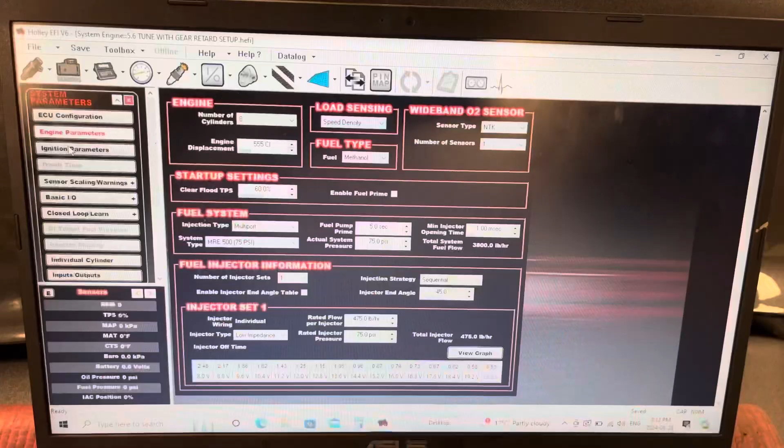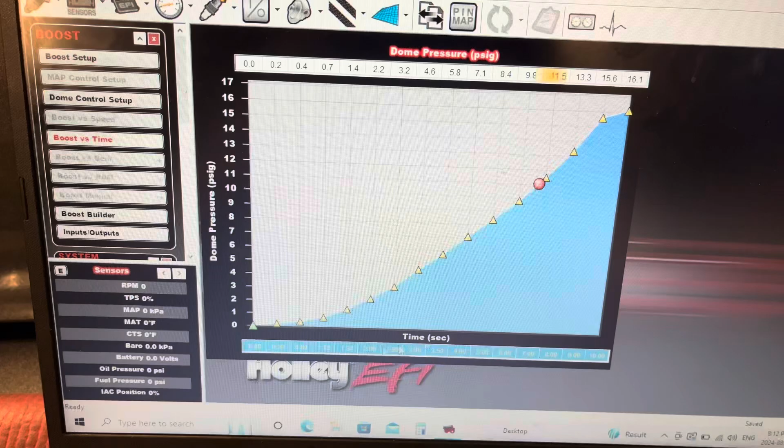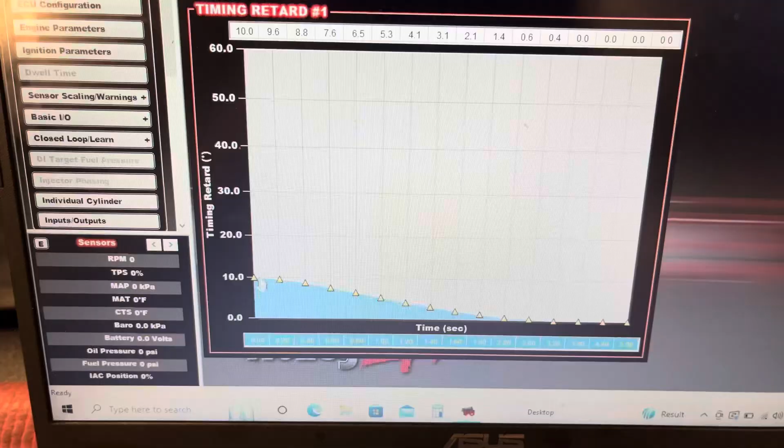So this was the tune, a 3,500 RPM leave. Nothing crazy on the boost ramp, basically not doing anything, on wastegates for the first little bit, and not really doing much till about 2 seconds. Timing-wise, I was pulling 10 degrees and putting it back in over 2 seconds.

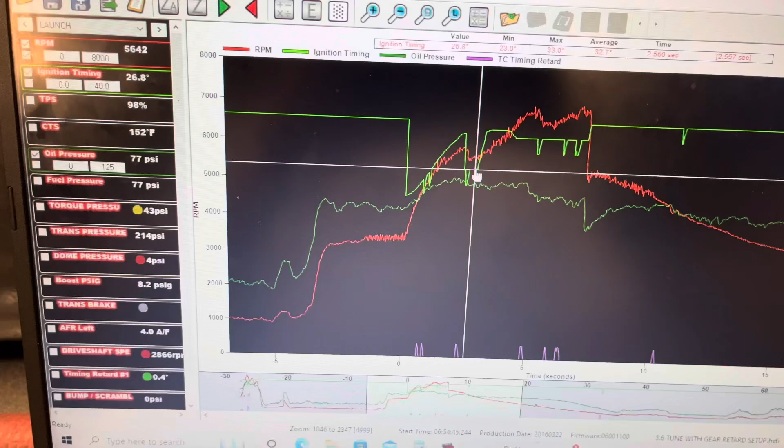And this is the data log. So it left at roughly 3.2 pounds of boost. I shifted first gear pretty low, 5,800, which I've been trying to shift a little bit lower. And if I look at the ignition timing here, this is the timing getting knocked off at the launch, this is it coming back in. Right at the shift you can see it drops off to, what was that, I think it was a 31. Yeah, 31, so it knocks it off to almost 27. So I had 5 degrees coming out for half a second.

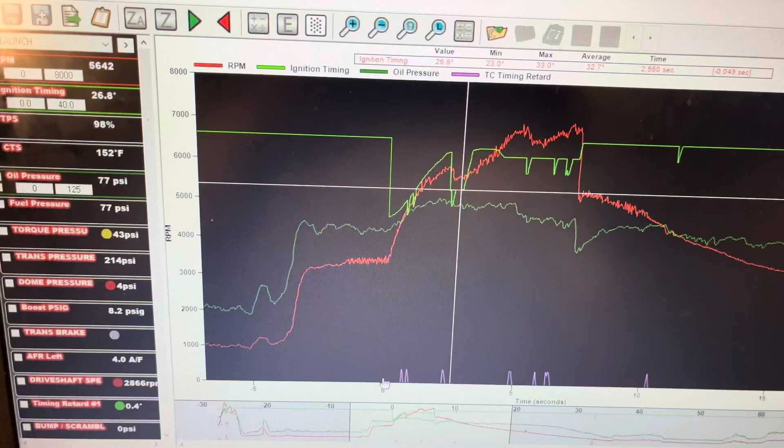So everything worked perfectly there. I do have a Davis-like traction control box in the car, and these are just little corrections it's making along the way, so it pulled a little bit there too. But basically the gear retard worked perfectly, made 15.4 up top. And the other thing I wanted to look at on my A to B pass was my oil pressure.

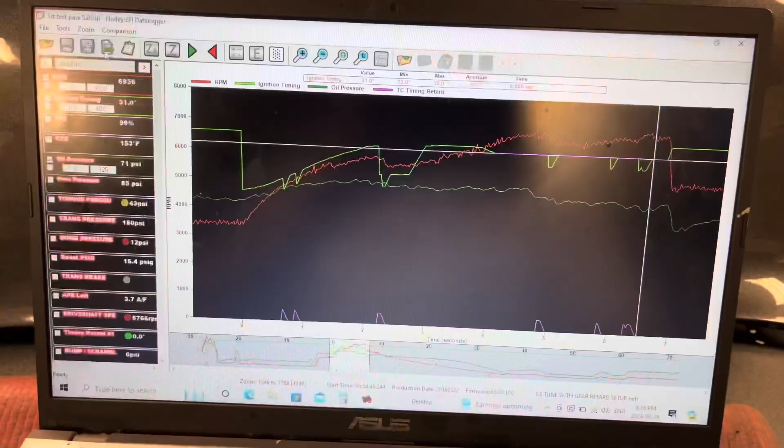I'm still a little on the fence about if there's something going on with the engine, so I really want to keep an eye on that. So if you look at the oil pressure on that run, which is now this green one, you can see that it made 66 right here on the trans brake.

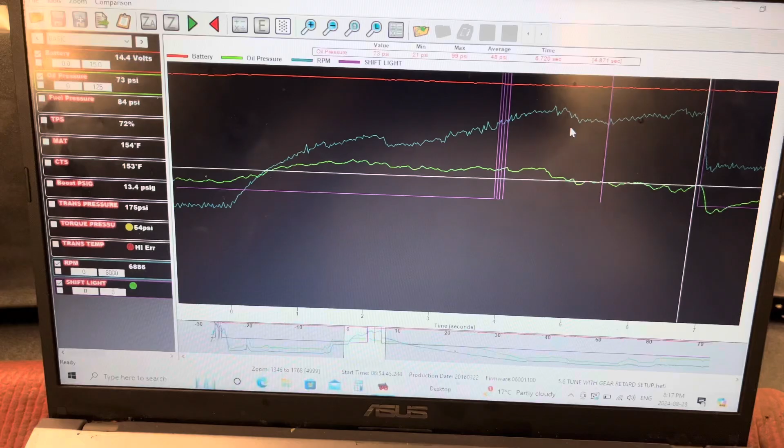Kind of dipped up to 79 through first gear, second gear 78. And at the end of the run it kind of dips down a little bit here, which, looking back at a lot of old data logs, is pretty normal for this thing. It does drop down to about 70, 73 there, so it loses a couple pounds, which looks to be pretty normal. Probably not 100% right, but I went back like 2 years looking at data logs and it gets to that one point and just dips down a little bit from there. So that one wasn't really concerning.

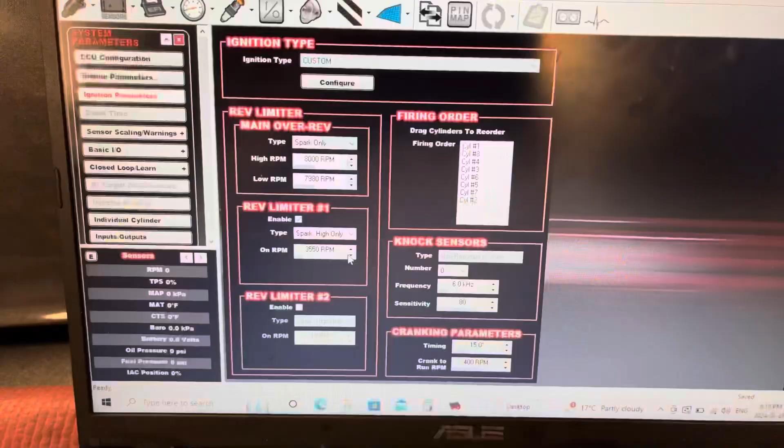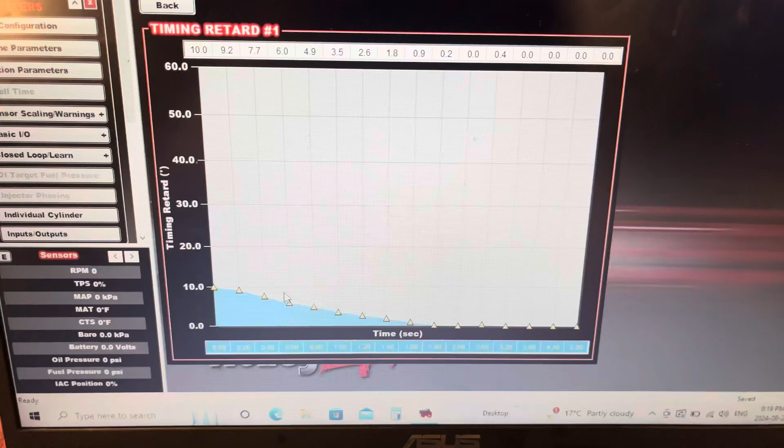So next pass, I tightened the front shocks up a little more. They still seemed a bit loose to me. And I started putting the timing in sooner. So this is my second test pass tune. I raised the launch RPM 50, and timing-wise I had it all back in by 1.8. I think I maybe chopped a little bit out, I think I just kind of massaged it through here, nothing major. And this was the second pass.

I really didn't step it up much more from the first pass. Just wanted another solid A to B pass. I think it picked up a little bit on the 60 foot, went about a 5.80 flat. Everything seemed to work good again. The launch retard's working good, the gear retard's working good.

On this one, the oil pressure took a little bit more of a dip near the end. You can see here on the trans brake, 64. Top of first gear, I shifted about the same, about 76 PSI oil pressure. Kind of maintained that for a bit, and then it did a pretty good dip right here.

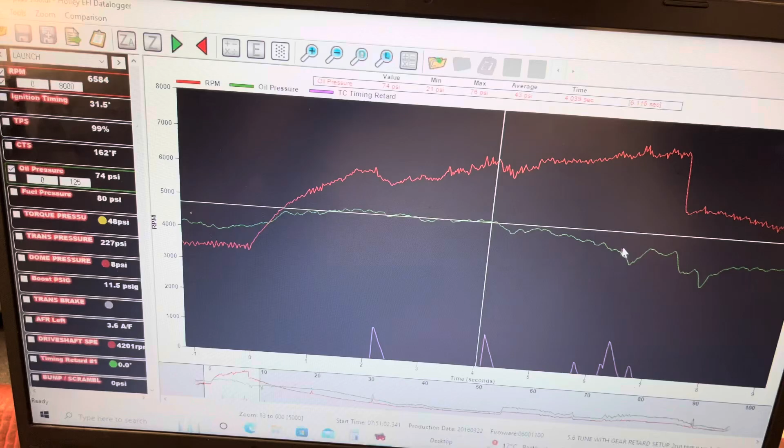Like I say, it always kind of drops off here about 5 seconds or so into the run, and I don't know if that's just a capacity problem or what. I'm guessing it probably is. It did a pretty good dip right here, think it went down to 58, yeah 59, sorry. Kind of jumps back up a little bit, 67. But that to me is a little bit concerning still.

So I added half a quart of oil to it, and I tried to put a little bit more in it because the 60 foot on these passes are pretty slow. Like I said, I was just trying to go A to B. And I tightened the shocks up a little more, but to me they still look loose.

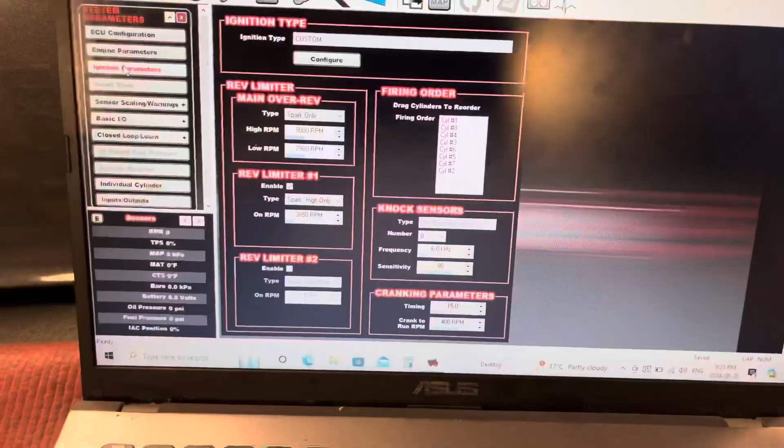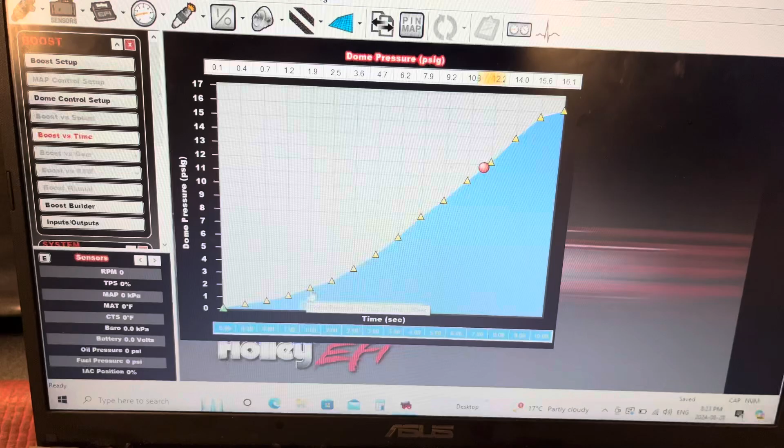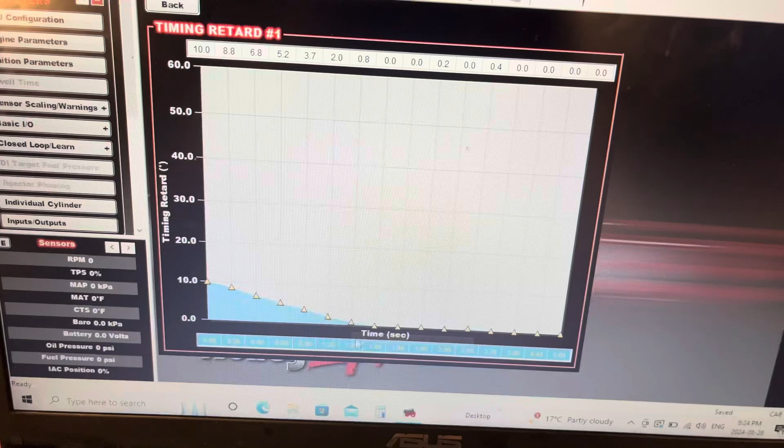So this is my third test pass tune. I went up another 100 RPM on the launch. I think I started bringing in nothing crazy, like half a pound of boost or something, not much more. But timing-wise, I did try to step the timing up pretty good. So I still left it at 10, but I had it all back in by 1.2 or 1.4.

So basically the car launched, it did pull the wheels a couple inches, probably 3 maybe 4 inches, pretty quick though. To me it's still way too quick and basically knocked the tires off. I kind of tried to drive through it, but it just didn't recover, I had to actually pedal it. So it did run the whole 8th mile. Really the main objective there was just to see if the half quart of oil helped it.

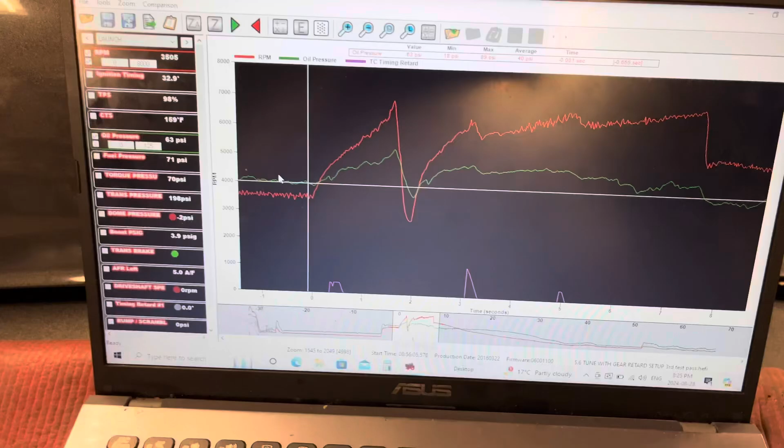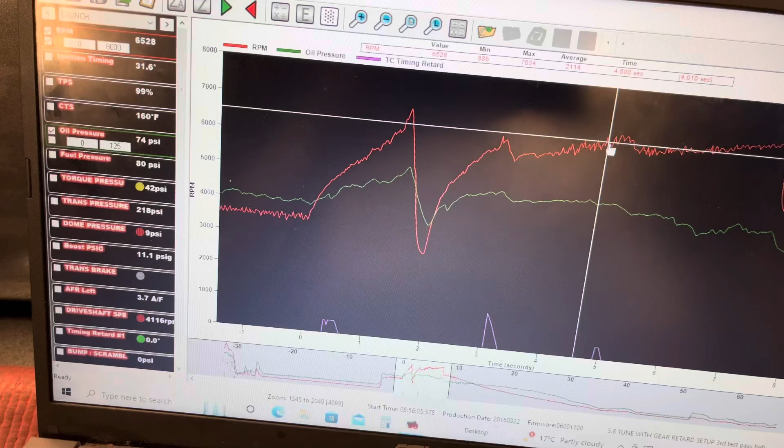So this is the data log. You can see I had a big pedal in there, but basically made 63 PSI on the brake. It's really hard to tell top of first gear, but if you go here, 75, which is the same as the other ones. 74 there, and it did get better out here I think. It's still 71 there, that's at like 5.5 seconds or so. It does a little dip here, down to 64, and then kind of bounces back up to 71.

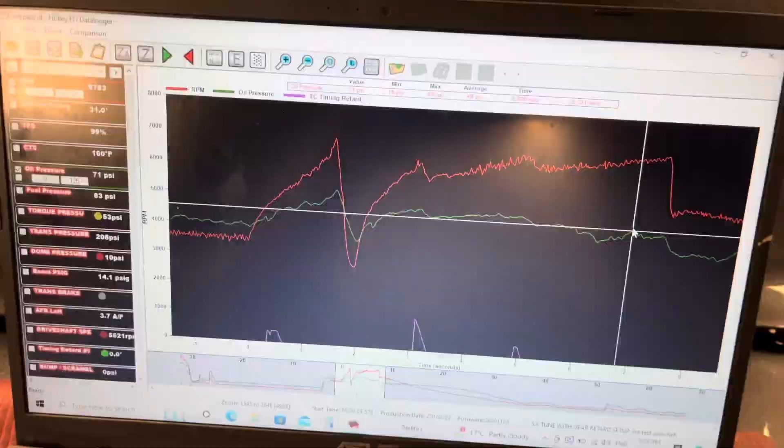So to me, I really think it is a capacity problem. I have about 2.5 extra quarts in it right now, so I probably have 9.5 quarts in the pan plus the filter. It's a 7-quart pan. I think the problem is a couple of issues that are kind of compounding together. I'm really looking forward to getting the motor apart in the winter and trying to fix this.

So problem one is the drain backs in the heads are absolute crap, I think. I don't even know if they're like a half inch diameter, but it's not good. I really should have spent some time and tried to fix that before I put the heads on it. Problem two is I have a high pressure, high volume oil pump, and I really should have just gone with the high pressure standard volume, because I think what's happening is it's basically just sucking the pan dry. It's all getting trapped up in the heads, just not making it back to the pan quick enough. So that's what I think's going on.

I looked at a lot of data logs this week from the past 2 years, and it basically always starts dipping off like that. Some passes are better than others. I probably was running these out just a little bit past the 8th, maybe why it looks a little worse. But other than that, didn't learn a whole bunch, I guess.

The new turbo is working, the tunes are close. The front shocks, I think, are still loose, which is pretty disappointing since I've already sent them back twice to get tightened up. Yeah, oil pressure, I'm still on the fence about that. But it was a good little test session.

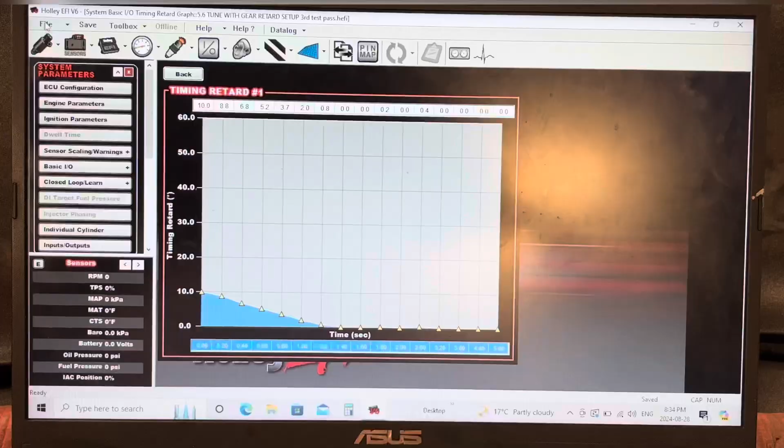So at this point, let's run through how to set up the gear retard. So basically, I'll start with a global file that doesn't have any of the stuff set up. Start in the advanced table, you need to start with the setup, you need to put how many gears you got. I don't do anything with the automatic gear or the automatic gear resets, I just left it at the default.

I don't do anything with the automatic gear resets, I just left it at the default. RPM drop for shift detect - so this you need to know how much your RPM drops when it shifts.

This is going to vary on car and converter and stuff. For that one, I'd actually put it at 200 just to make sure it got it. I think the problem is if you got it set too low and the RPM is dipping a little bit, it might think that it's a shift when it's actually not. But 200 to 300 seems to usually work pretty good for me.

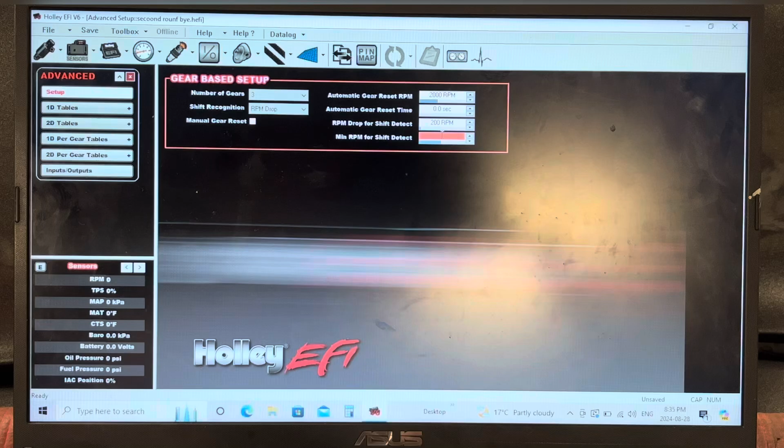I used to do this with my old MSD box. Minimum RPM to detect a shift, I usually keep around where I have my shift light set. So if I have my shift light at 6,000 or 6,500, I'd probably set this around like 5,800 or something. You could probably even go like 5,500, just so you know it's actually going to hit it. I don't know, there's probably more magic to that, but this worked for me.

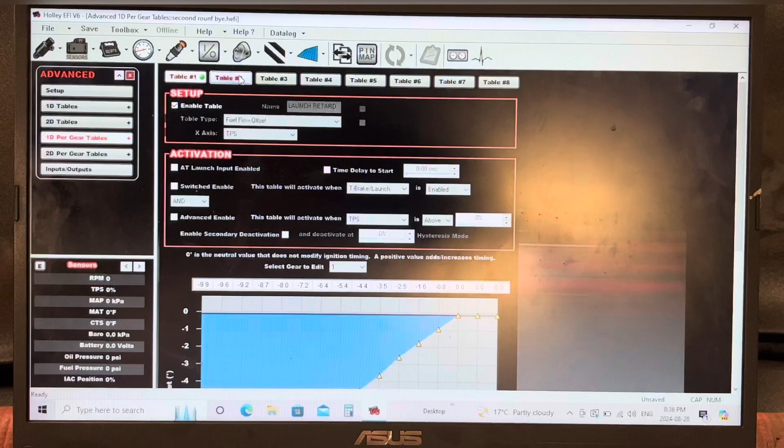Then from there, I went to the 1D per gear table. I started a new table. You need to enable it so that you can modify it. And I labeled it gear retard.

This will be a timing offset because you're going to be varying the timing with it. And on the x-axis, I went with time.

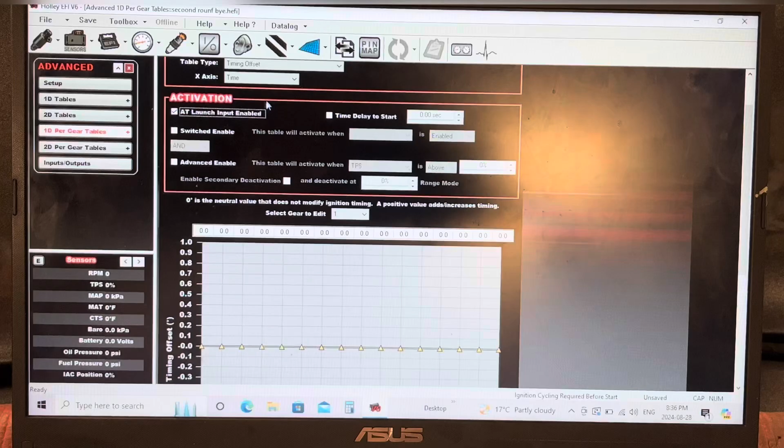For activation, for me, was a little tricky. You could do it at trans brake release or a couple different things. But actually, I'll show you. So if you do it at launch input enabled, you need to add that on your pin map, which if you have a Dominator or something, no problem. But I'm running an HP and all my stuff is full, so kind of limited on where I could go. So I got a little creative.

I went switched enabled and I went, this table will be active when timing retard number 1 is enabled. So when it's on my timing retard table and it's working, this will be active as well.

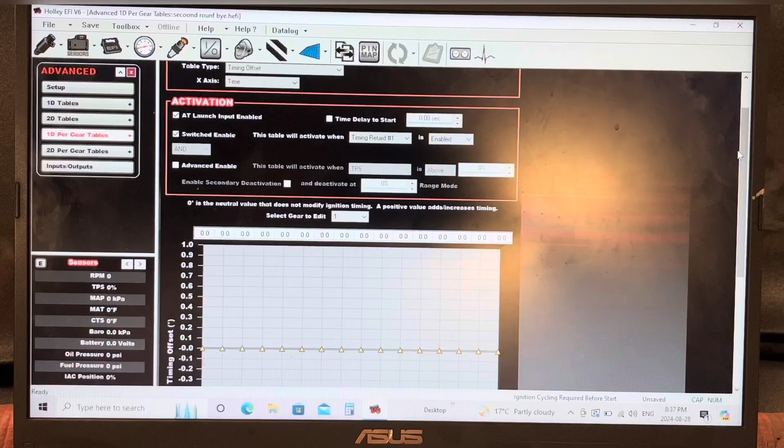And from there, this is where I got a little messed up. So you need to change this for the gear you want to edit. First thing I did was I went down here and put them all to 10 seconds. You could definitely go way less than that, but I just was experimenting and 10 worked.

So I set all the gears, 1, 2, 3 to 10. And first gear I didn't do anything with, obviously. So you'll see it'll change here, but first gear, second gear, third gear. First gear I did nothing with. And second gear is really where I'm having trouble.

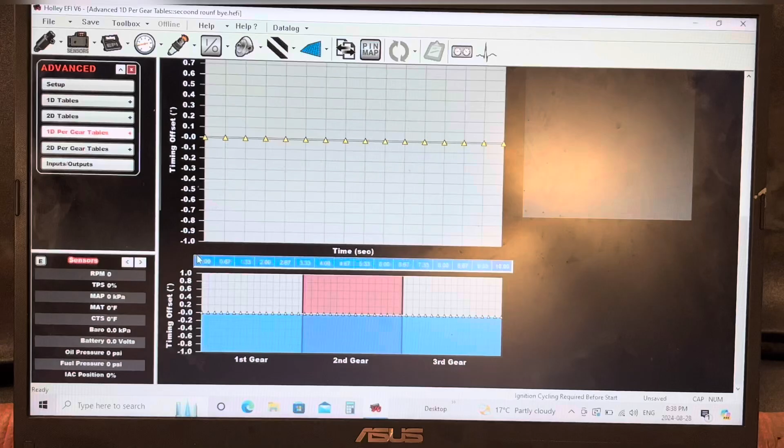So at second gear, at 0 seconds, you can add timing or you can take timing away. So I'm going negative. I went -5. And I changed this to 0.5, the second number, but however long you want to pull it out for. So basically, it's going to pull 5 degrees for, I think I did it like this. I did 5 degrees for half a second, and then it ramps it back in over.

So you can put that to 1. You could probably tighten this up a little bit, but like I say, I was just experimenting. So this would be 5 degrees out for half a second and just going back in over 1 second. So you can mess with that, put it wherever you want.

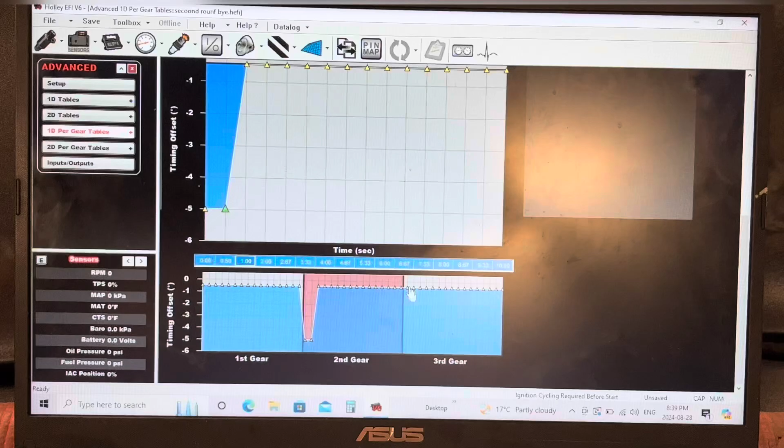And then if you wanted to add another one for third gear, you just change that to gear number 3, and then whatever you want to pull for third. I'm just making up numbers at this point, but it would be like that. And it would show up on the lower graph.

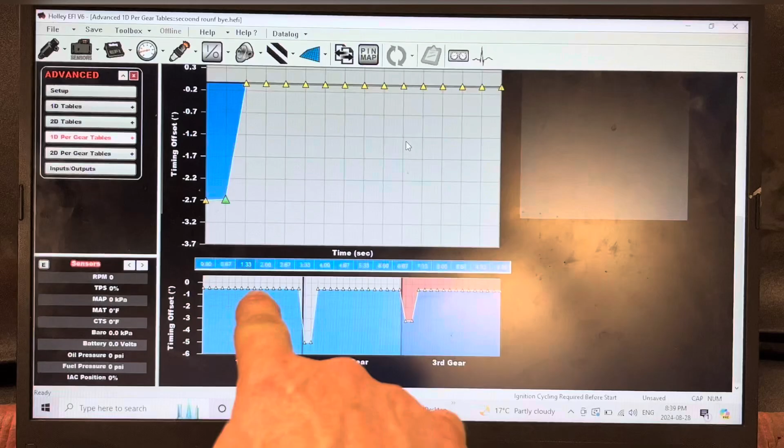So really not much to it. I got really messed up because I didn't see that, but keep in mind you can add or take timing away. That's basically it. And then your activation, that's the only real tricky thing you might have to figure out. But for the most part, that's it. It is pretty easy, I just couldn't find a nice how-to video on how to do it.

So if you're looking for one, here it is. We've all gotten pretty spoiled with YouTube and stuff where you can just go on and see exactly how to do stuff like this, so I was surprised that there wasn't one. That's how I did it. It worked for me. I still got to do more experimenting with it in an actual no-prep scenario.

So I think that's all I got for you guys. Yeah, gonna go over some stuff here, figure some things out. Might just see what I can do to maybe band-aid the shocks for now. Either maybe pull a bit of weight out of it, see if that helps, just so it doesn't transfer so fast.